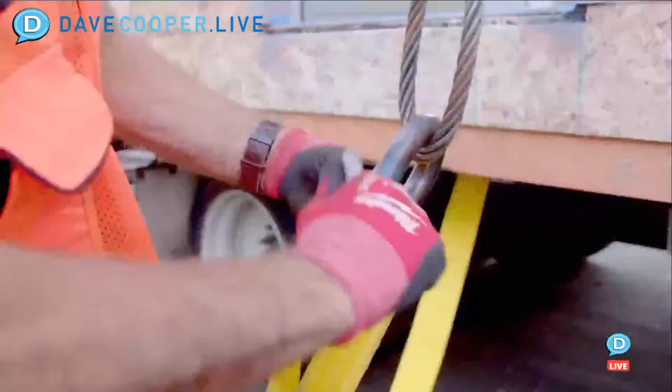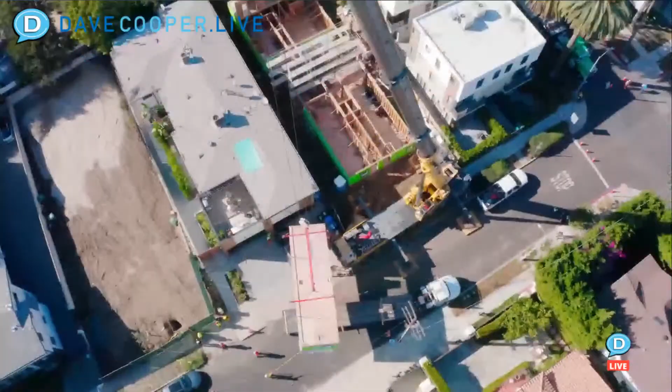This is a small project in West LA where 4 modules make a unit. There's 4 units in this project. It's a very high-end project. We did this with Plant Prefab.

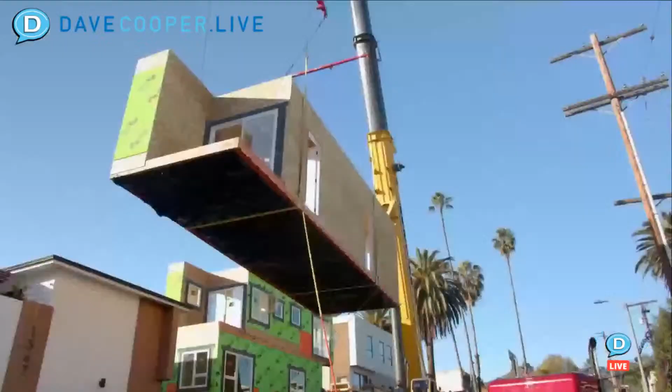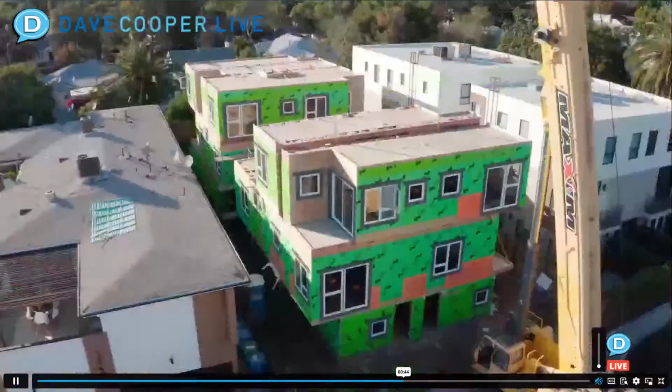Really enjoyed the relationship. Super challenging, tight site, as most modular sites are. That's our crew there, our hand-picked guys that we trained from day one. Some people are born into this industry, others are recruited in, and we spend a lot of time on training and really try to bring the best talent to the customer.

Where was this project at, Al? So this is in West LA, West Hollywood. And how long ago was this job with Plant Prefab? This was last November of '22.

So let's get into it. Plant Prefab is a great place to start. Steve Glenn was at the helm of that company for a lot of years.

How did you do this project? Who was the customer? Where did you start? Did you always start off? Were you just the set crew? Were you the GC? Were you the design partner? Were you the intermediary between everybody? Walk us through all the different facets of how you can help people.

So, yeah, embarrassingly, you're catching me off guard with the name. I'll have to come up with their last name. Two great guys that are developing in West LA came to us, and it's a great question because it really fits our model.

We sat in on and helped with all the design meetings. We help with coordinating the architect with the manufacturer. We were invited to be the GC. We submitted a GC bid, and we also cultivated other GC competing bids. We really want to find the best fit, best contractor for every project. And we know sometimes it's not us.

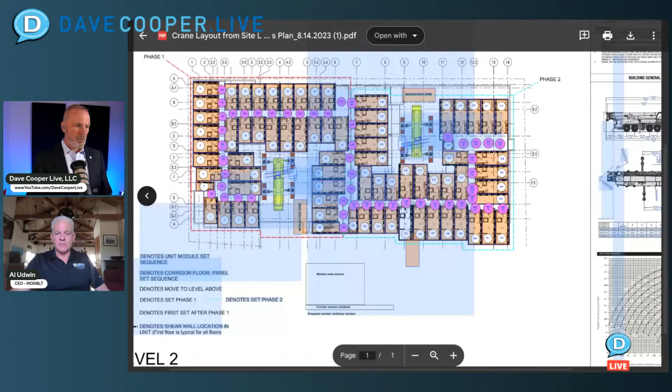While Dave brings up that graphic, I'll let you know that we looked at this site completely surrounded by high tension power lines. On the bottom of the page and on the right hand side, there's power lines. On the other 2 property lines, we have 0 lot line buildings right at the property. So there would be no way to use a crane to set modules on this project without entering the project.

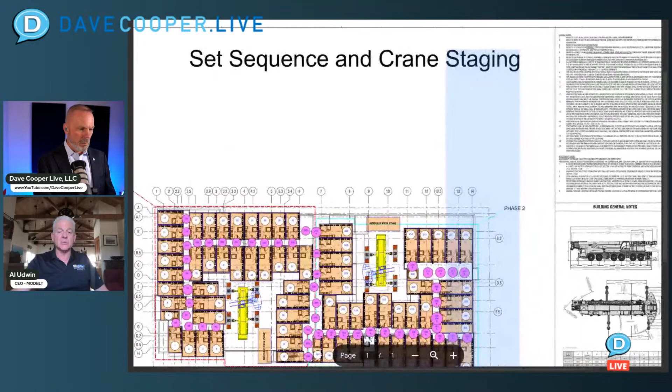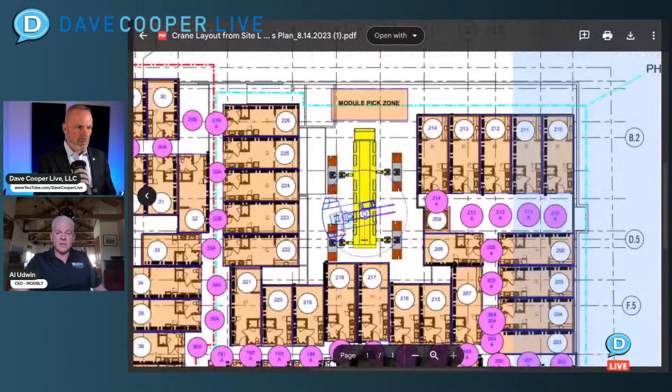So we actually designed those 2 crane locations, which are on top of a podium. At both locations, you see a tan area that says module pick zone. Those cranes, I forget exactly what they weigh, but we're putting that on top of a podium deck over 1 level of parking. The crane on the right needs to enter under an 18-foot high podium deck. It takes 15 semi-trucks of counterweights to build this crane. The crane builds itself in that space, a super tight space.

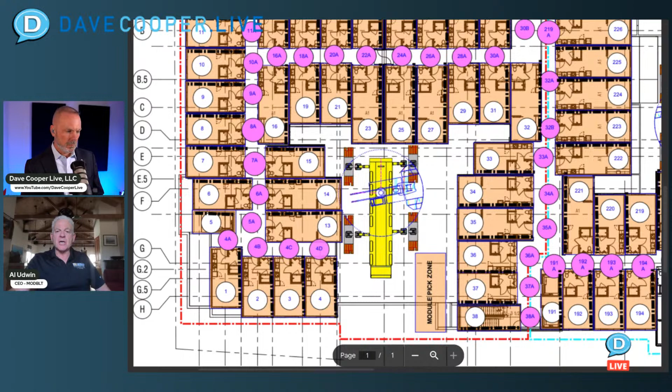Out of 376 units, about 340 are fed into this podium, either from Main Street at the bottom of this area or from Satella Street on the right. So we designed the crane locations first and designed the project around it.

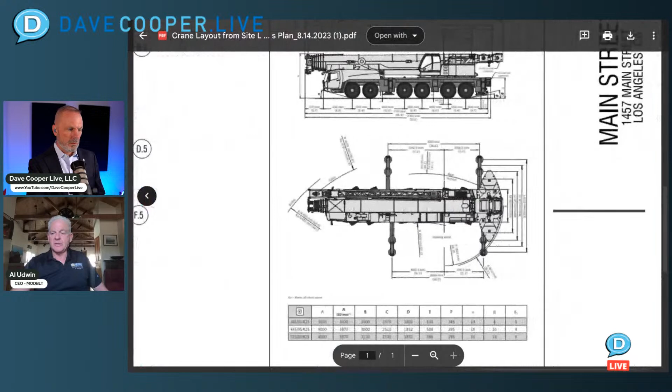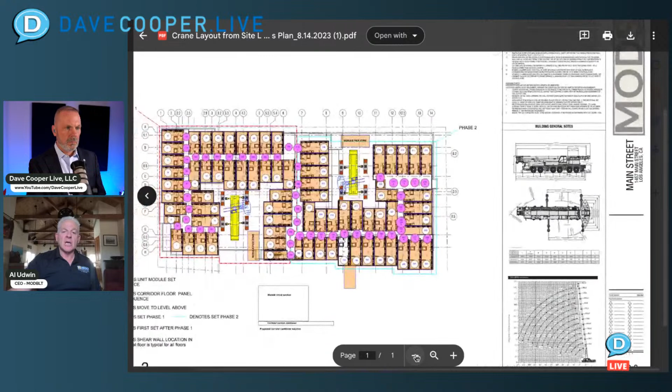This is Architects Orange Design. We've worked with them from day one. We were involved with the developer, Ben Shaul, since he started the purchase of this project over 3 years ago. We've worked side by side with Ben's team through the design of the project, everything from the shoring, tieback agreements, through modular design. We're partnering with VBC on this project to build it as a modular project, and we expect ModSet to be the setting team. We are the construction manager on this project. So we have a full team on site, really sharp guys that we're fortunate to pick from really good companies, guys with great experience and training and lots of modular under their belt to help us with this project. So I think it's a great project to showcase what we do.

Yeah, and is this an elevation rendering of that same project? Should I put that on screen? Yeah, that'd be great. Why don't we share that as well so people can see it?

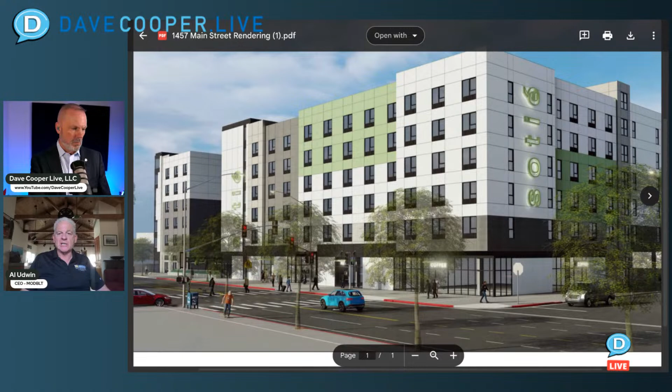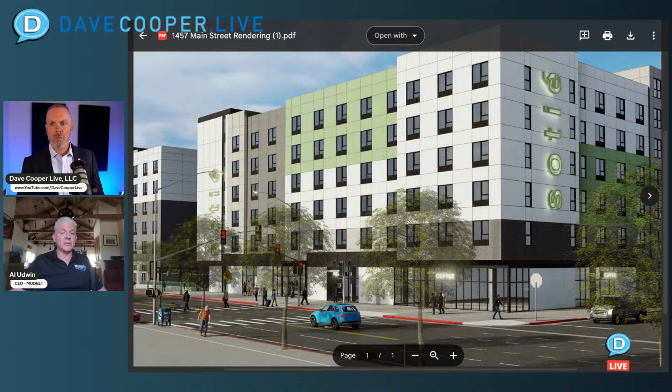So very simple but elegant exterior. You don't really see, as with any well-designed modular project, you don't really see this as being built as modular. We spent a lot of time consulting on issues on this building that are not specifically modular, like the exterior finishes, how the details go together, the waterproofing systems, podium deck design. We're currently working on roof deck design. And we've done a lot of these, so we know what works and we've seen what doesn't work.

We certainly have had our ups and downs in terms of projects that have challenges. We all have that, and we try to learn from that. We try to set up tours of past projects to develop lessons learned and help our clients avoid those lessons.

Yeah, for sure. So where did this passion come from? I know you traveled the world. There's been a lot of research on it, but who comes home and says, well, listen, we need to do everything soup to nuts. You didn't just start in one area. You kind of built, maybe you did, but you had a bigger vision on how this could run the gamut from the design all the way through the delivery. Walk us through the process. How did you begin? What was your first project? And then talk to us a little bit about your growth right now.

So I spent, since I was 17 years old, my career working on multifamily stick frame projects. As a project manager or a VP or president of construction of multifamily stick frame, you have really one individual that takes responsibility for the project from beginning to end. But we don't really see that in modular projects.